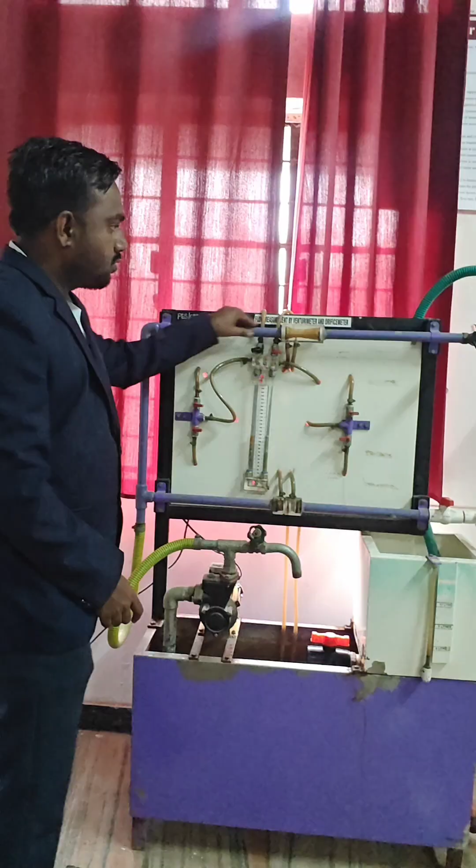Here is a reservoir in which the water is stored. On the reservoir there is a motor. The motor is connected to the pipeline through which our water gets discharged into the measuring tank. You can see here the measuring tank has a cube cross-sectional area.

Okay. Now we already know the formula for the discharge measurement: Q is equal to volume of water collected in the measuring tank divided by the time required to collect the water. So here the tank has a cube shape. So the volume of this tank is the width of the tank, breadth of the tank and the height required to store the water, and we have to calculate the time required to store the water up to the decided height.

So here the measuring tank dimensions are: the width of the tank is 30 centimeter, we have already measured that. The breadth of the tank is 30 centimeter and the height that we are going to take is 10 centimeter. For that 10 centimeter height we have to calculate the time required. Okay, so let's take the reading.

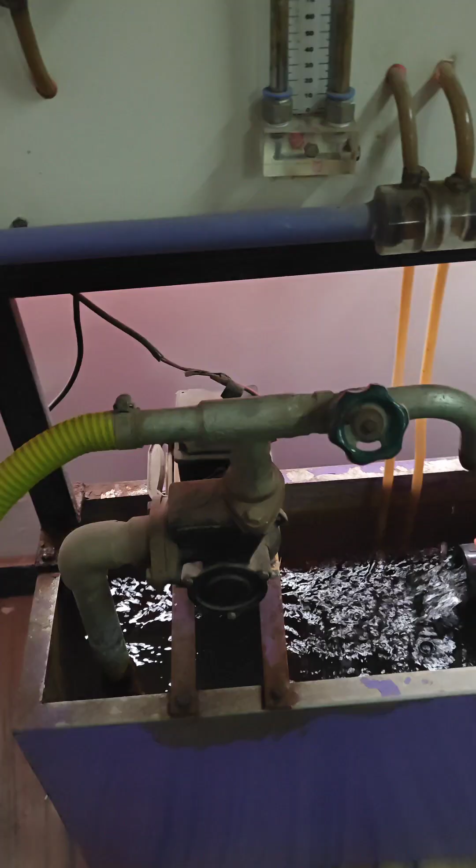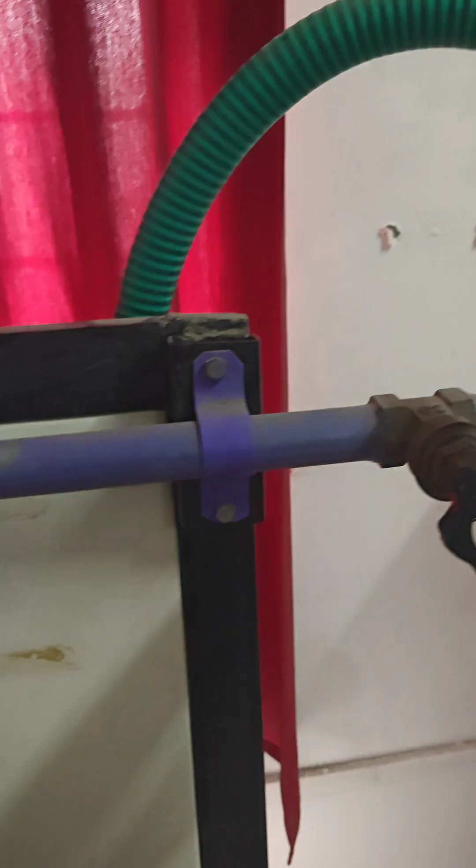Now here we started the motor. The water is flowing from this reservoir to the pipeline. Here is the pipeline through which water is flowing, and water is finally discharged into this measuring tank. We have already taken the dimensions of this tank for volume calculation.

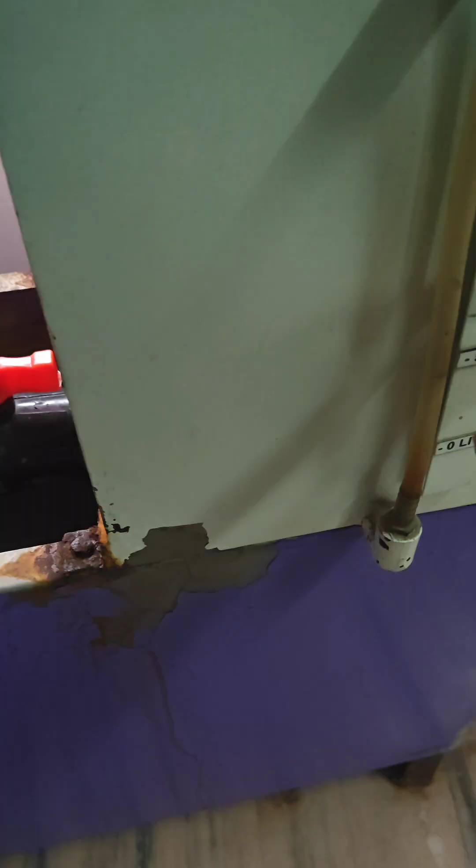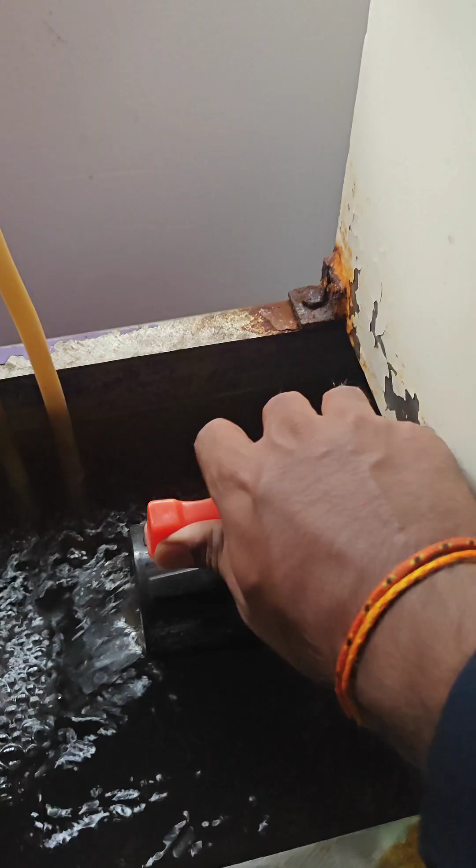Now to store the water in this measuring tank up to the height of 10 centimeter, we have to first close the outlet of the measuring tank. So let's close the outlet of the tank so that the water gets stored in the measuring tank.

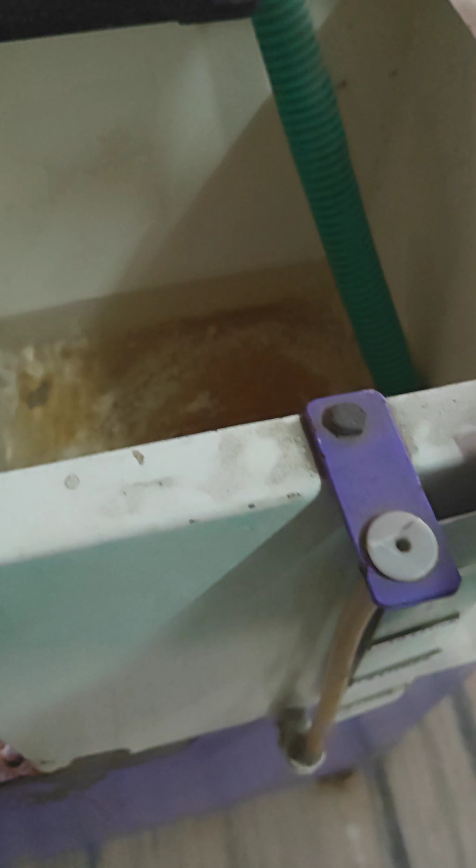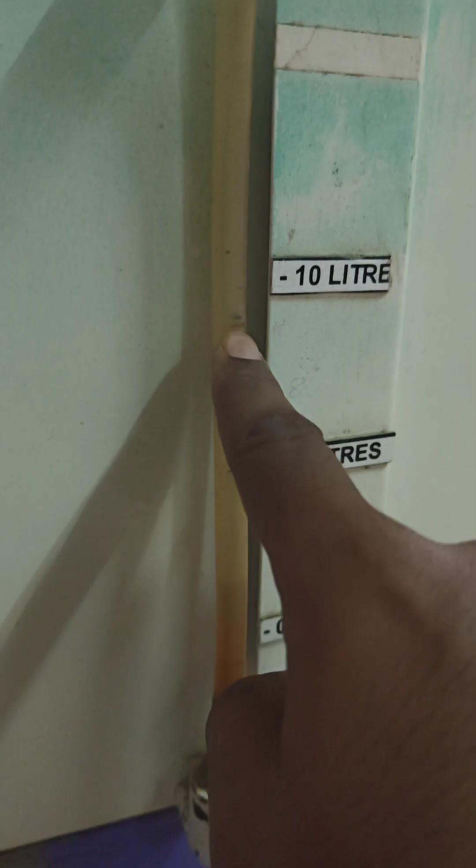Now here the water level is rising, and here for the height calculation, we have already marked the reading from 0 to 10 centimeter. Here is the marking of the 10 centimeter. So we have to calculate the time required to raise the height from 0 to 10 centimeter.

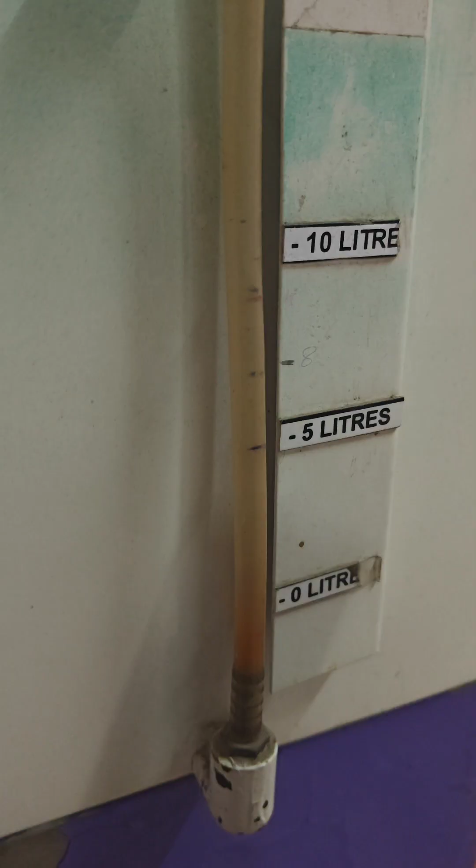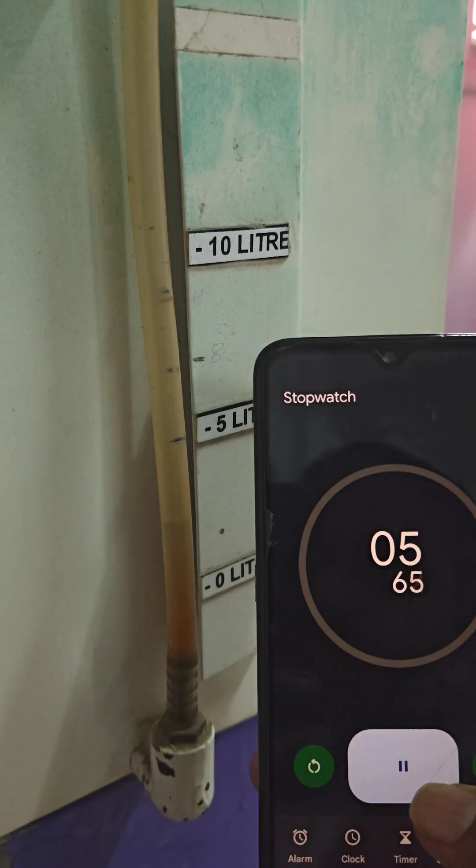Now observe the water and just start the stopwatch when the water level is at 0. Now stop the stopwatch when the water level is at the 10 centimeter marking.

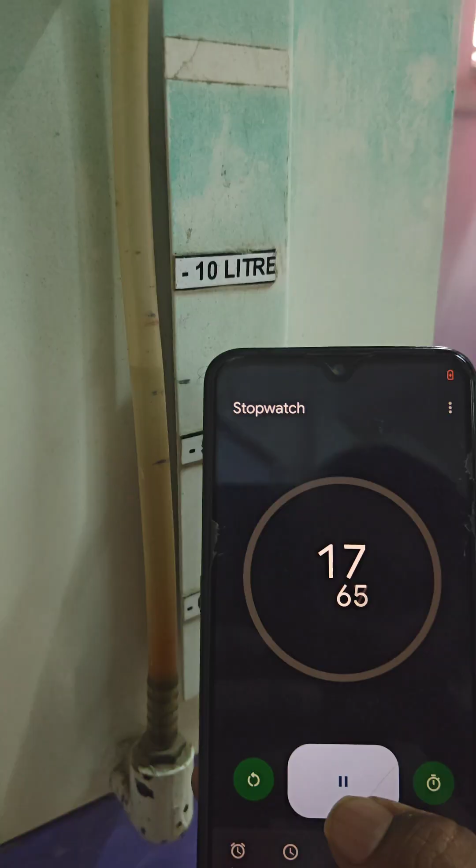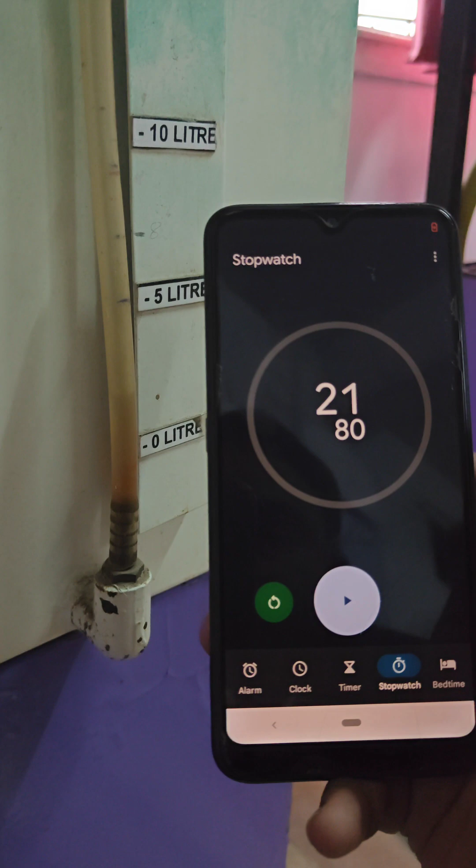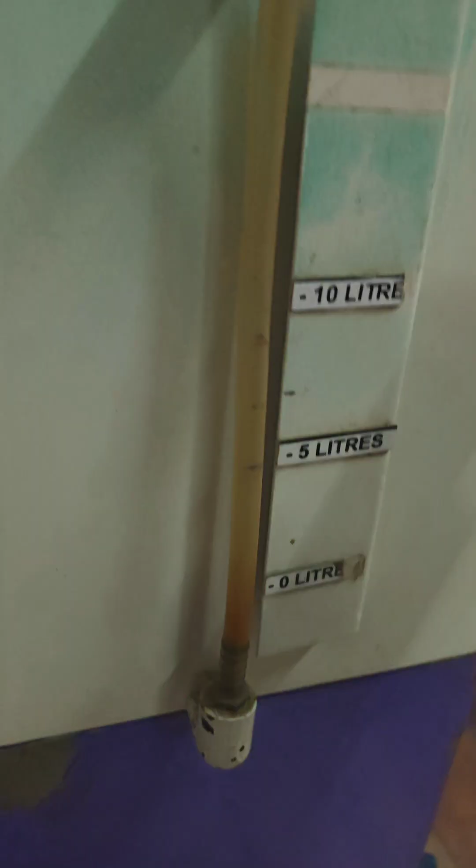So the time required to collect the water in the measuring tank up to the height of 10 centimeter is nearly 22 seconds. Similarly, we have to take the different time readings for the different heights for the same pressure of the water.

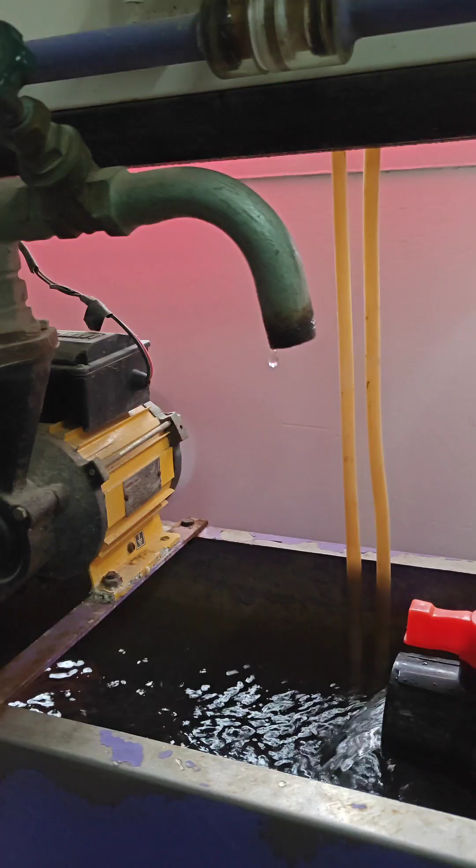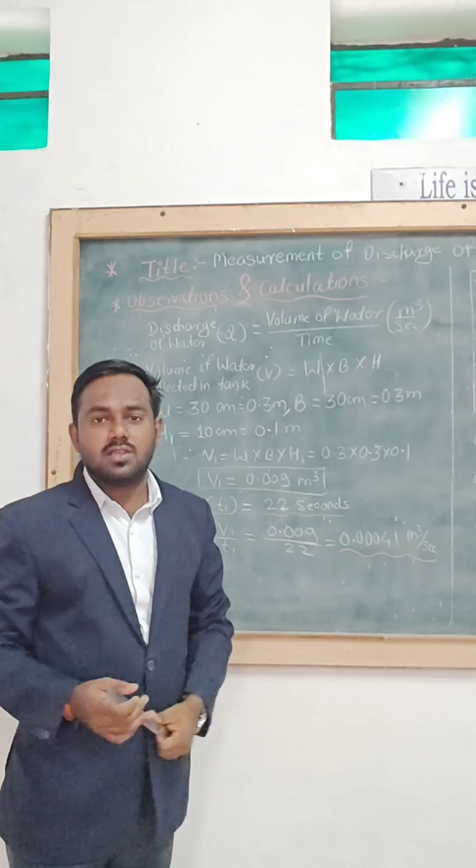Let's see the calculation part of this experiment. So here is the calculation part for the discharge measurement of water by using measuring tank and stopwatch. So in observation, we have to calculate the discharge of water. The discharge of water is nothing but the volume of water collected in a measuring tank divided by the time required to collect that water. Okay. So how can we calculate the volume?

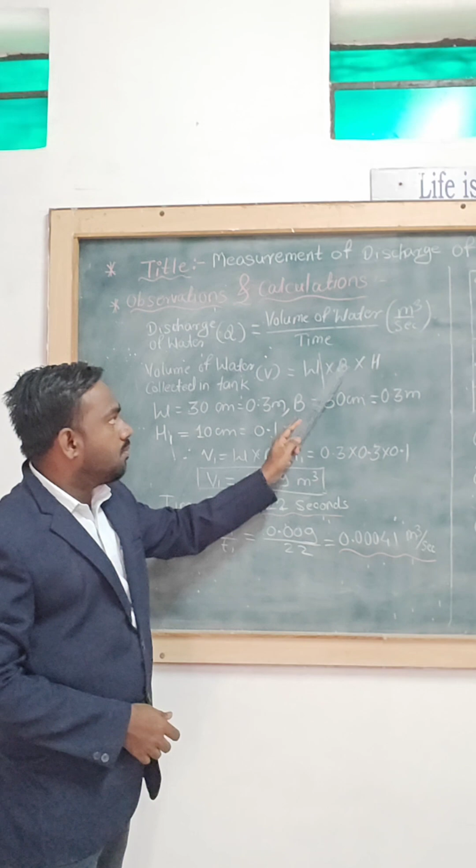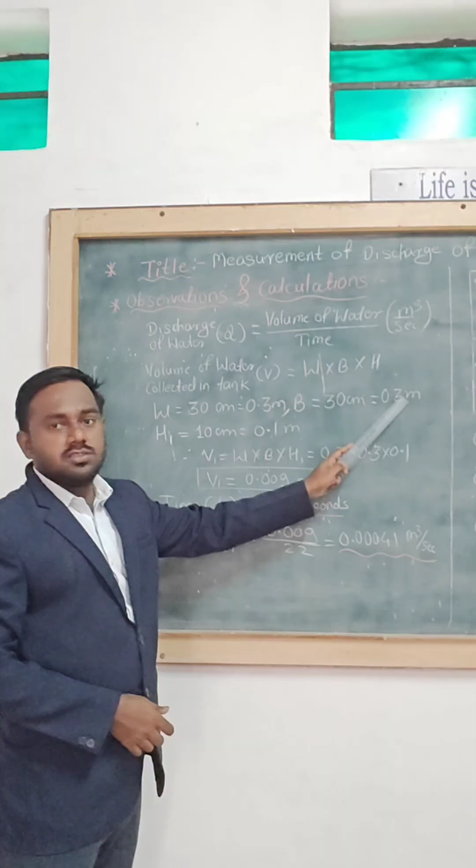The volume of water collected in the tank, that is V, is equal to width of tank, breadth of tank and height up to which we have to collect the water. So the width of our tank is 30 centimeter. We have to convert this centimeter into meter. So 30 centimeter is nothing but 0.3 meter. The breadth of the tank is again 30 centimeter. In meter it is 0.3 meter. The height we have taken for the first reading is 10 centimeter, which is equal to 0.1 meter.

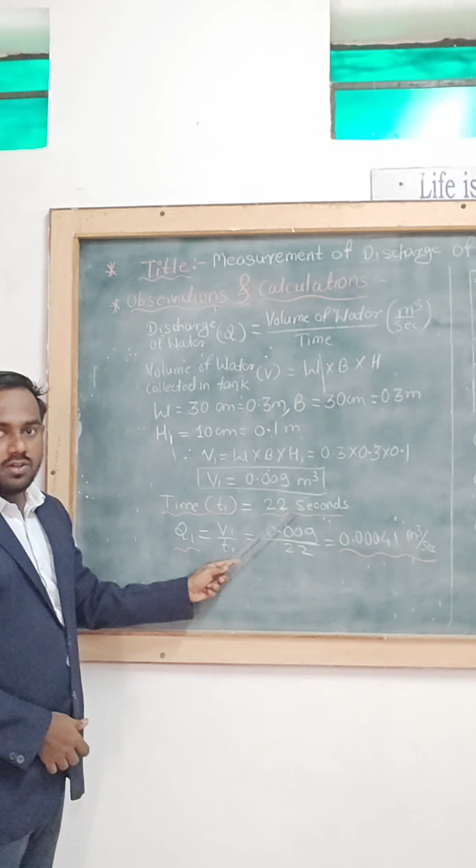So here, volume calculation: volume is equal to width into breadth into our selected height, that is 0.3 into 0.3 into 0.1. So the volume we get is 0.009 meter cube, and the time required to collect the water at height h1, that is 0.1 meter, is 22 seconds, as we have seen in our experiment.

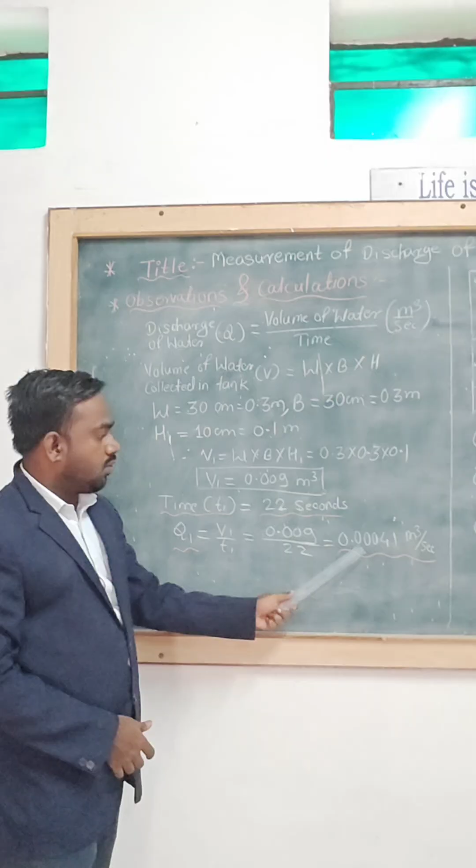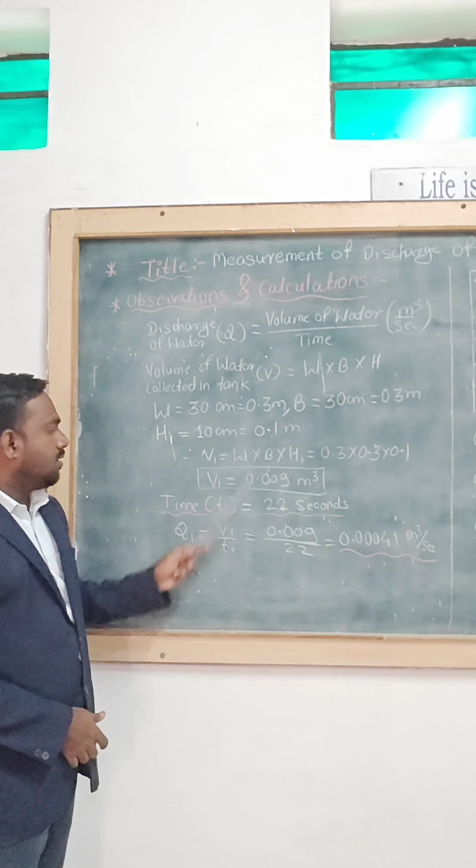So our first discharge is volume upon time. Our volume is 0.009 and time required is 22 seconds. So its division is 0.00041 meter cube per second. So similarly we have to vary this height, and for this height we have to calculate the time required to collect water up to this height. So let's see the observation table.

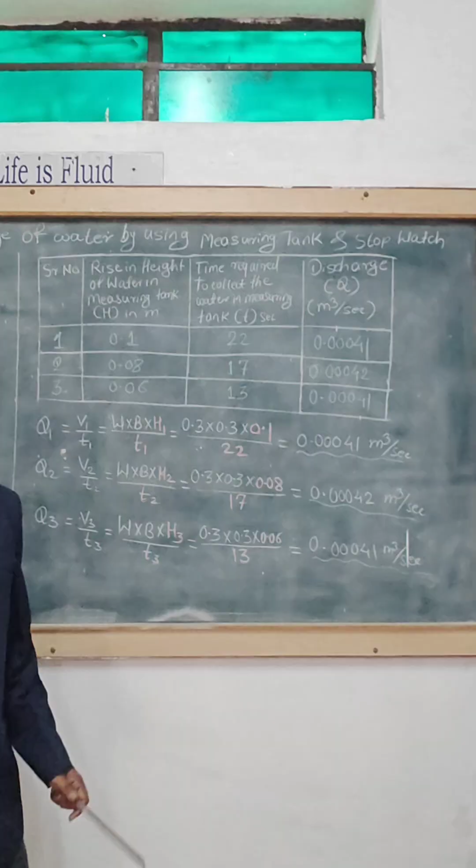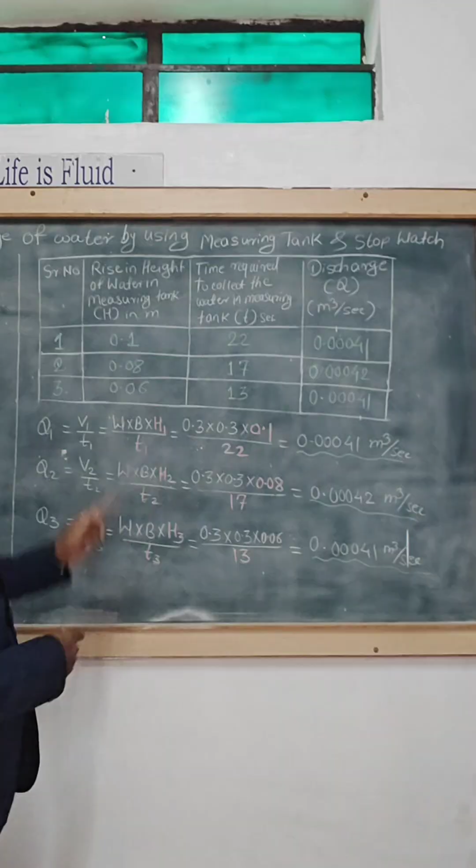Here is the observation table. The first column is rise in height of water in the measuring tank, that is h. For the first reading we have taken it as 0.1 meter. The second column is time required to collect the water in the measuring tank, that is t in seconds, and the last one is the discharge Q in meter cube per second. So for the first reading, 0.1, the time required is 22 seconds, and the discharge we got is

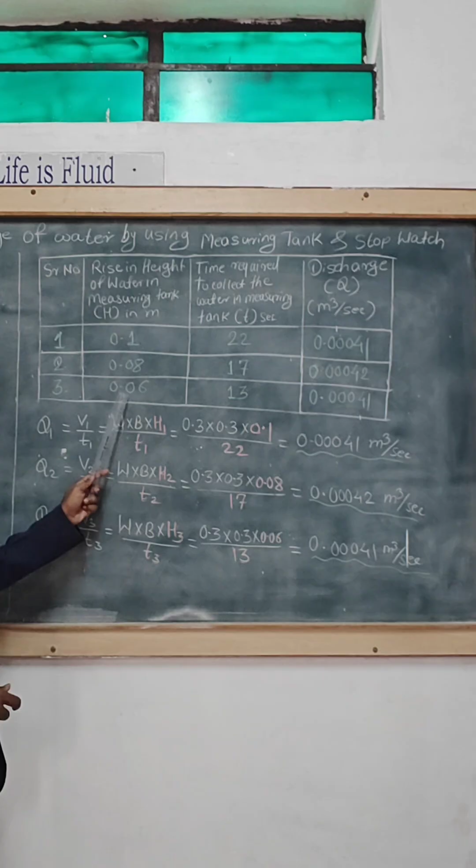0.00041. For the second reading, here is the calculation, volume upon time. The height we have taken for the second reading is 0.08 meter, and the time required to collect up to that height is 17 seconds. So here is the discharge. Similarly for the third reading, the height we have taken is 0.06 meter. The time required to collect the water up to that height is 13 seconds. So here is the calculation, and finally we got the discharge of

0.00041. So from this experiment we can conclude that for the same pressure and different heights we got nearly the same discharge values. So our discharges are nearly the same, so our readings are correct.